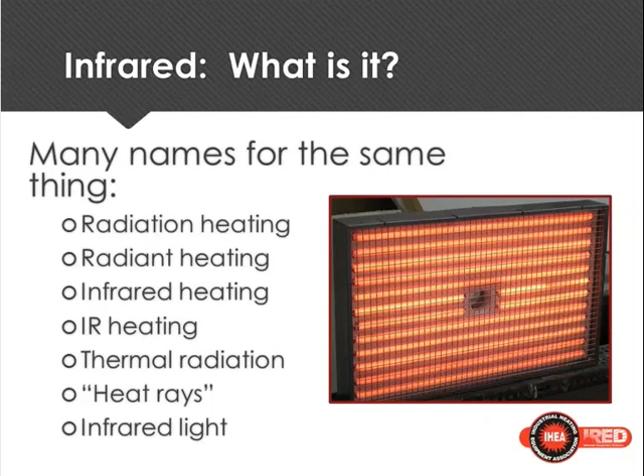Just a brief look at heat transfer, because this is how we need to talk about infrared basics. If you think about a campfire and you put a metal poker in the fire, it's going to get hot. The heat is going to work its way up the metal, and eventually if you grab that poker that had been laying in the fire, the end of it could be very hot even though it wasn't in the fire, because the heat conducted up the length of the steel poker. That's conduction. It needs contact.

Convection is like holding your hands above the fire and feeling the heat rising effect. Radiation is when you're off to the side and you can feel that heat from the glow of the coals or the flame, but you're not actually touching the flame or in the coals.

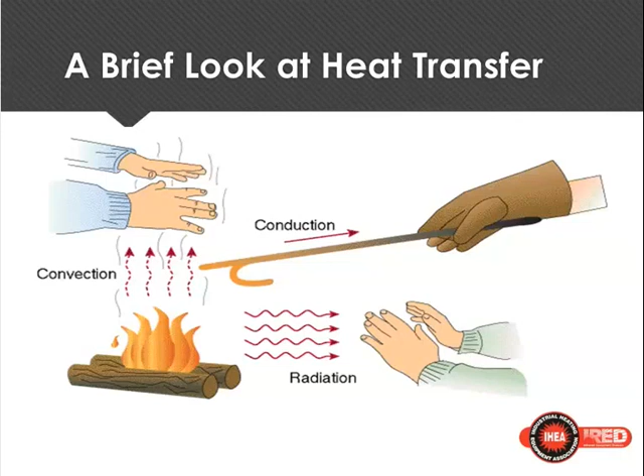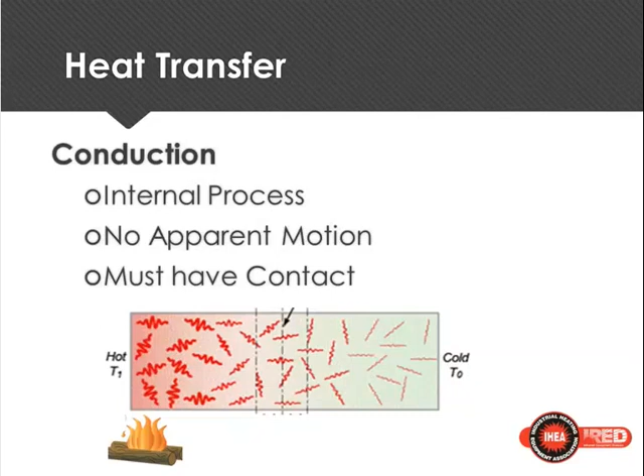So a little bit more on these. Conduction is an internal process. As you can see in the little picture, there's the hot fire on one end of the poker, and that causes excitation of the atoms, and that heat will gradually move down through internal contact. But looking at the poker itself, you don't really see anything moving - it's an internal process for conduction. Conduction can be important with infrared use in a curing process. We'll see that later.

Convection is like a typical convection oven you could have in your kitchen, or a natural gas convection oven, just a typical furnace. You have a heat source - it could be electric, it could be natural gas - but then you move that heat, you blow that heat, you force that heat. You can have natural convection, which is like heat rises and cool air sinks, but forced convection is typically the process we see, and it's an external process. It acts on the external part of a turkey in an oven to cook it. So convection requires some motion, and you heat all the air and move the hot air around the item to be heated.

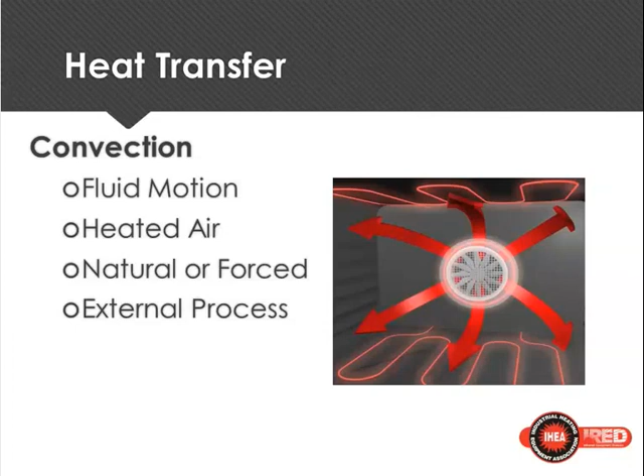Radiation, which is IR, is the third method of heat transfer, and that is the electromagnetic spectrum. If you remember, we talked about visible red, and infrared is to the right of that. There's no medium needed. If you had to have a medium or an atmosphere to move radiation, the heat from the sun would not get to the earth. But the heat from the sun travels through the vacuum of space and gets to the earth with plenty of heat still in it, and the heat comes out upon impact. So infrared rays from the sun impact the earth and heat it up.

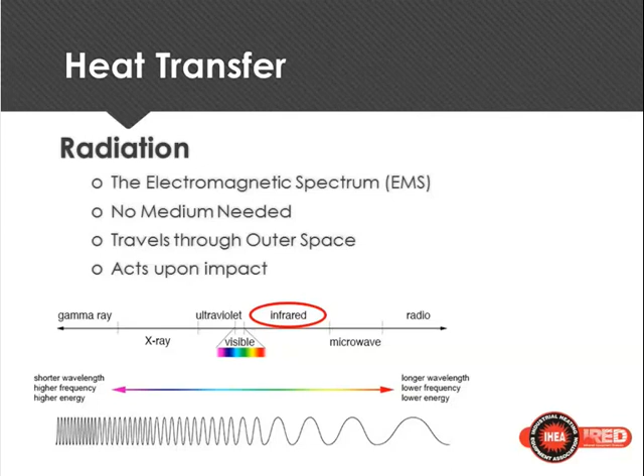Infrared light or infrared heat from a heating element impacts the part, but it doesn't have to heat all the air in between. It heats the part when it contacts the part. We'll see a little bit more about that in just a minute.

Here's a few characteristics about infrared. Not all infrared is created equal, and you can target your infrared heating wavelength to suit the product you're going to process. If you need a short wave or a long wave, the infrared equipment manufacturers can help you determine what's best for your process and application.

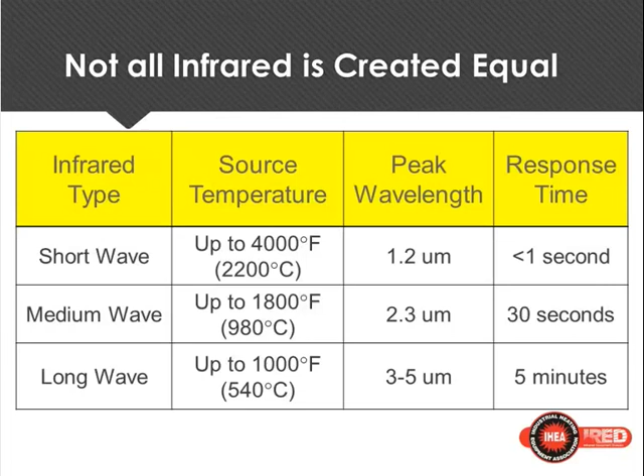Here's a graph of those same characteristics. Going from 0% to 100% available energy from the infrared source, you can see the short wave gets to 100% output in a matter of seconds. Medium wave takes maybe a minute or half a minute, minute and a half, and long wave takes up to 4 or 5 minutes. So processes that need fast, hot would tend toward short wave, and vice versa.

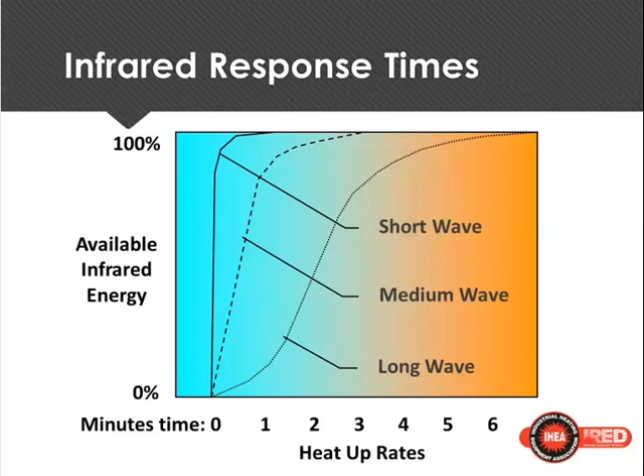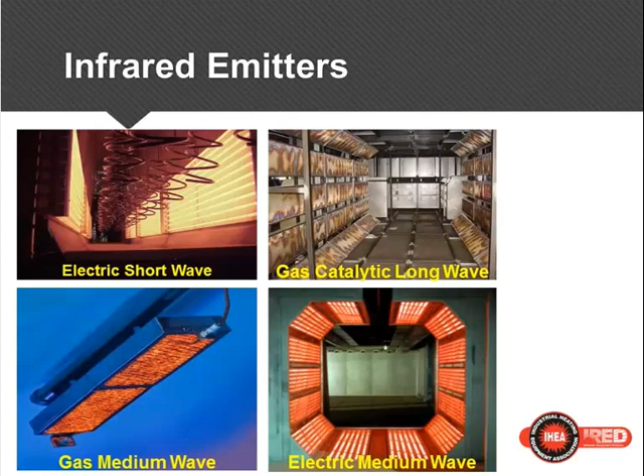So just a quick review about what is IR. It comes from the Latin infrared - infra means under red on the electromagnetic spectrum. Heat transfers by radiation, which is a line of sight to the part from the heating element. It's part of the electromagnetic spectrum, and it comes in a variety of wavelengths you can make use of depending on your special application or product shape, size, or configuration. So short wave is very fast and very hot, medium is pretty fast and medium hot, and long wave is a little cooler, still hot, and takes a little longer.

But everything with a temperature above absolute zero, anything with heat, emits some infrared energy. Human bodies do, electrical wires, anything hot, a heating duct inside a building, an oven, buildings - just looking at the envelope of a building. The higher the source temperature, the more energy that's emitted and the more intense it is. So a mouse is going to emit infrared energy, but you can't cure powder paint with a mouse. Heating elements have intense shortwave infrared, and it requires a line of sight - that's not necessarily a limitation, but to get the heat into the part, it needs to be seen by the element. But if there's a blind corner, that can be heated through conduction.

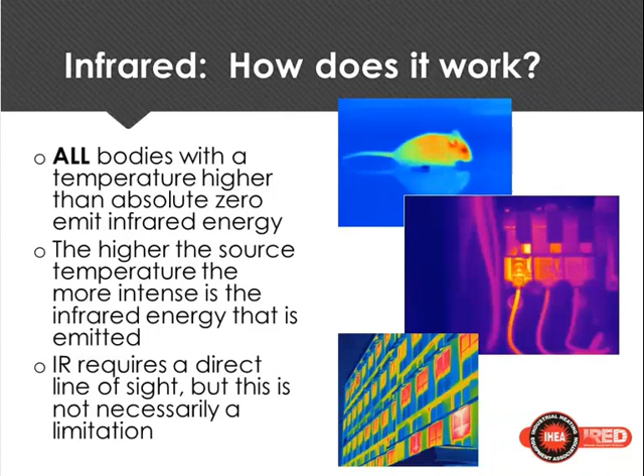The absorption is the key. So what your equipment guys can help you with on an application is find the right wavelength, the right configuration of the elements, and the right heating levels so that most of the energy gets absorbed and your part will get hot. You don't want to have it blasting through there with 90% of your energy being transmitted or 90% of it being reflected. You want to optimize your infrared heating element to your part so that most of the energy is absorbed at the proper level. And again, the energy source can be natural gas or electricity.

So for an object to be heated by infrared, part of it has to be absorbed. If there's no absorption, it's not going to get hot. If it just passes through it or reflects, it's going to be very limited heating. An object must absorb some of the infrared energy to heat up.

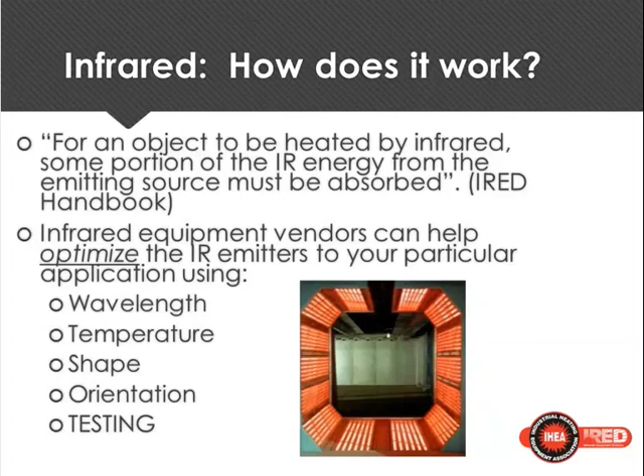So you can do a recipe for a given part. But picking the wavelength, the temperature, the shape of the emitters, their orientation toward the parts, and then of course the bottom line is you're going to want to run tests and make sure the configuration works the way you want it to.

Stefan-Boltzmann law - this isn't something we're going to try to do any math on today, but the whole point of this is just to show you that the power from infrared is proportional to the temperature to the fourth power. So there's some Stefan's constant, the area, the emissivity, and the temperatures. But the bottom line I'd like you to get out of this is if you double the temperature, you get 16 times the power.

So the fourth power - 2 to the fourth power is 16. So you really get with a little bit of temperature change, a lot more energy transfer with infrared.

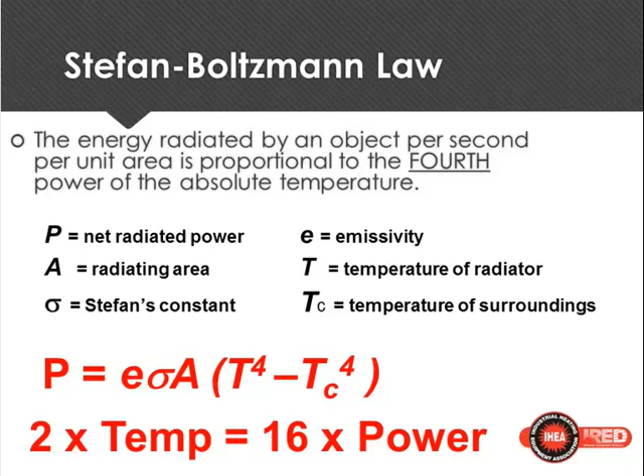Just a few things about the emitters. Again, we talked about shortwave, and here's some examples - very hot, very fast, up to 4,000 degrees heating elements. Can heat up very fast. They're pretty much instant on, instant off, which can be very good for production or changeovers, and very fast response time.

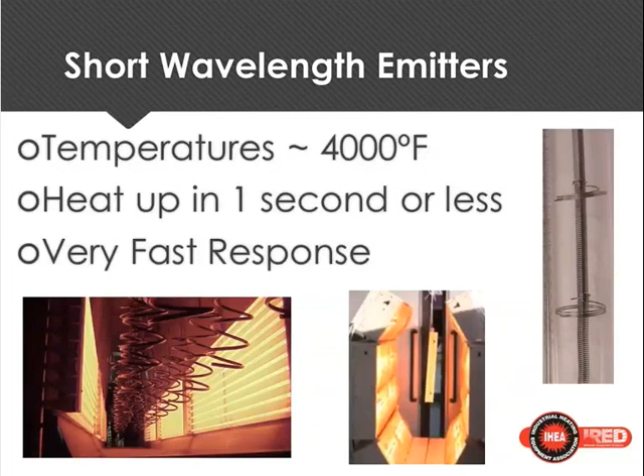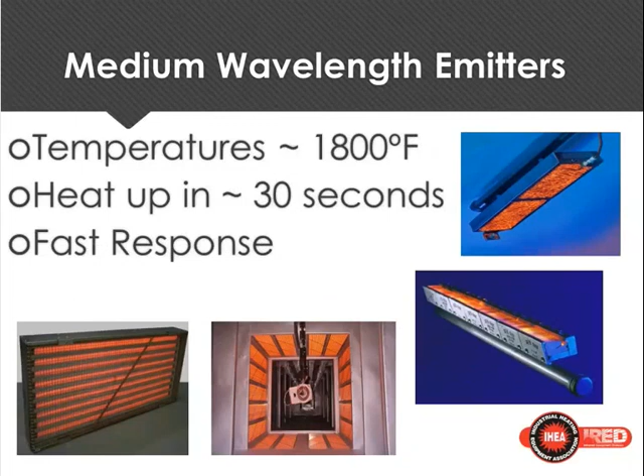Medium wave emitters, again, are more down in the orange color range, 1,800 degrees, typically pretty fast heat up rate still. And then you've got your long wave, which is more of the dull red, lower temperature, but some processes don't need high temperatures. Heat up is still fast compared to a natural gas convection oven.

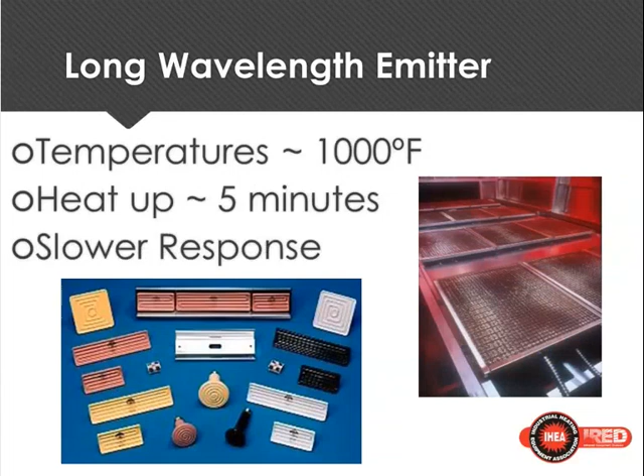So a quick review of how IR works. You need a line of sight. All the emissions from IR - remember this is important - they're going to be reflected, transmitted through, or absorbed. And absorption is the key to getting heat into your product from an infrared source. The energy source to create the infrared can be natural gas or electricity. And there's a very wide variety of emitters, arrangements, sizes, recipes, and programming that can optimize an infrared oven to your parts and your variety of parts. The IR equipment vendors can really help you optimize your system to match.

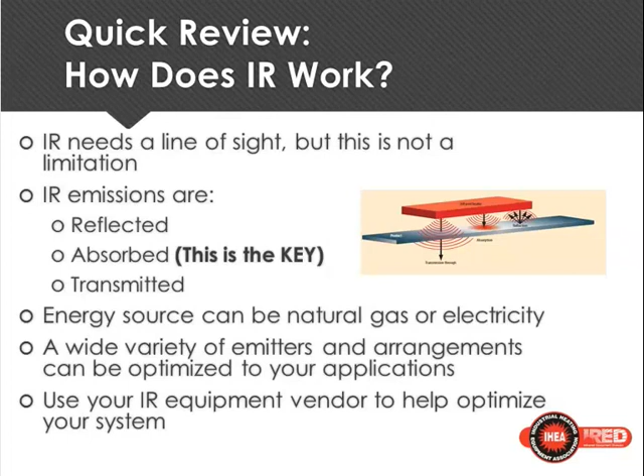Here's just a few factors to consider when selecting IR: the total output you need, how far you should be from the emitter, and the reflective characteristics. Are you trying to infrared heat something black or dark, or something shiny and reflective like a mirror? Is there air movement, or do you need air circulation? What's the aspect ratio—are you doing a sheet of plywood, or a solid cube? All those factors need to be factored into your process.

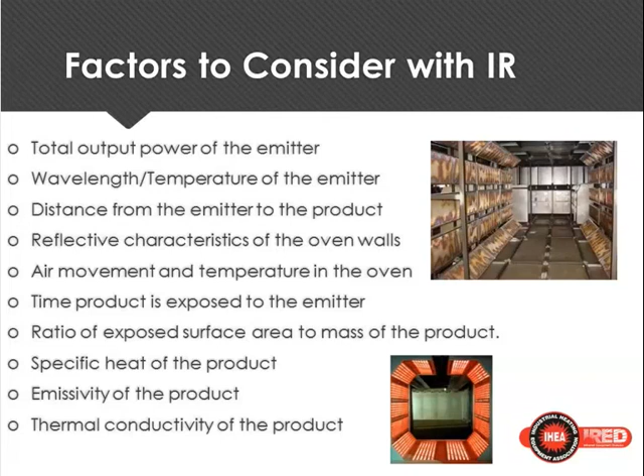Some typical applications—the guys are going to take off on this next, but here are a few things you can do with this. That picture is a thermally formed laminated floorboard for a car; you use infrared to heat it up and then mold it to this shape. There are dozens of others beyond what's listed here, but those are some of the main industries that use infrared.

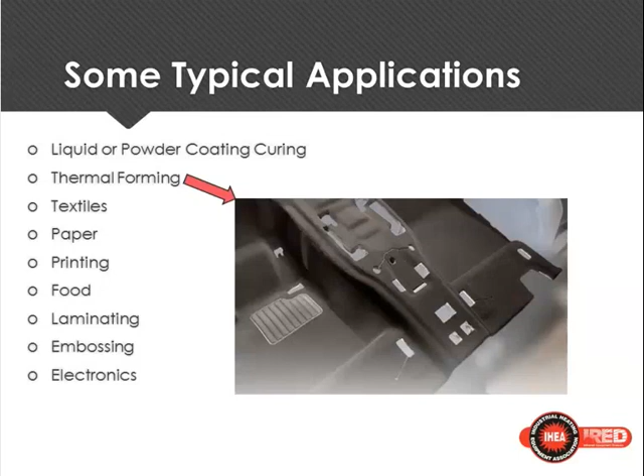So just a basic review: infrared is part of the electromagnetic spectrum of radiation. It's very fast and very efficient—almost 98 or 99% of the energy from electric heating elements is converted to heat. The applications are very flexible, nearly unlimited. You just need to get with your IR original equipment manufacturing vendor and test it. You can arrange the elements geometrically, set the heating, the timing, and the geometry, and really optimize for any given part. So the applications are literally just about unlimited.

And that's all I have.

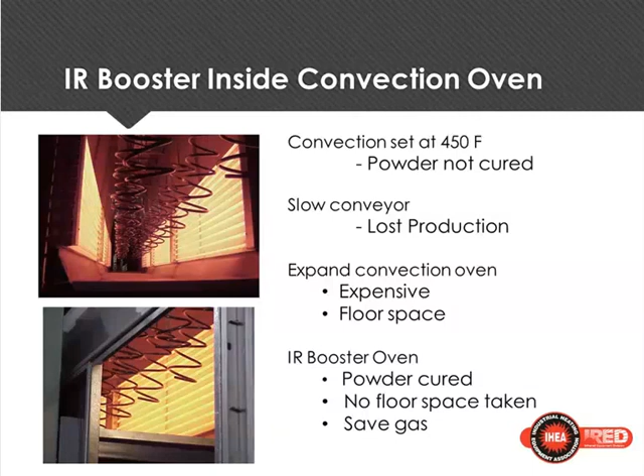This customer did not want to change how he loaded and hung the springs. Some powders have overbake in them, so here we had a 100-degree differential, but there's a 100 degree overbake in the powder. Keep in mind, all we're trying to do is speed up his process, get more heat into his product faster in the first part of the convection oven, and the rest of the hot air will normalize this. At the end, these temperature curves come together and finish out his process. In 2 minutes and 23 seconds, we were able to speed up his line and create the production he was after.

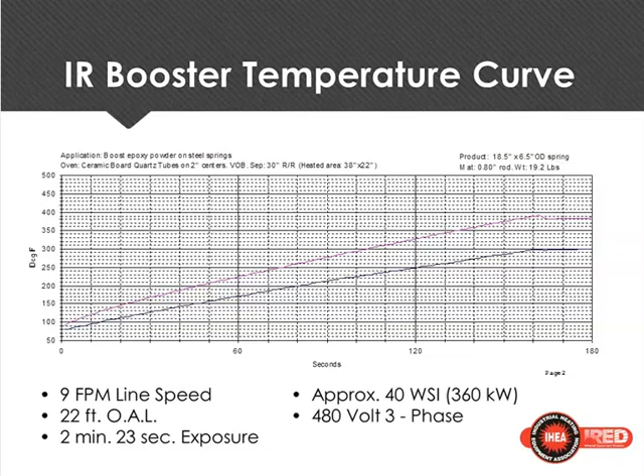This next process is something we do through lab testing—we found that short wavelength T3 quartz lamps work well for curing water-based lacquer finishes on cabinet doors.

And we also do the stains, the sealers, the coatings, and stuff like that. Keep in mind that when these elements are in front of the heaters, the parts maybe get exposed for 20, 30 seconds at the most. That's all it takes sometimes. Again, lab testing and knowing the product, the different stages of stains, sealers, and top coatings in this industry matters. It doesn't take a lot of time to do this stuff with infrared. It just needs the right wavelength that works well with the application. So again, lab testing.

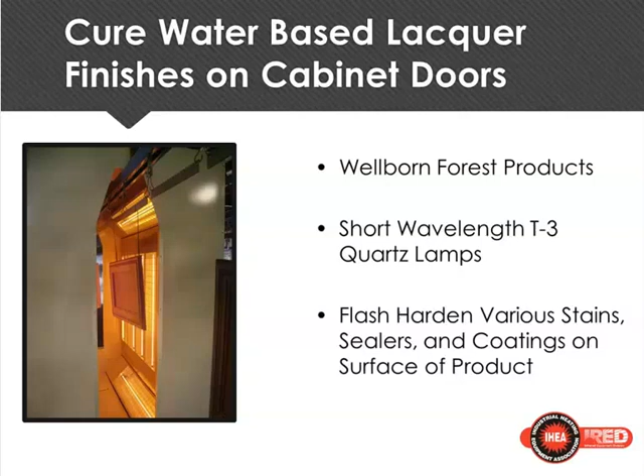This next application is a rubber, water-based coating, again on extruded rubber seals. They're running this rubber seal like a door seal on an automobile, at 30 to 80 feet per minute. This is rubber, and it's black, and it heats up really quick. And if for some reason the line stoppage of the rubber seals going through here would stop, it would burn up in the intense heat that we have in here.

So again, we chose shortwave quartz lamps because of the fast response time. This thing heats up and cools down. We reduced our cycle time from minutes to less than 30 seconds, depending on what seals they're running through this oven.

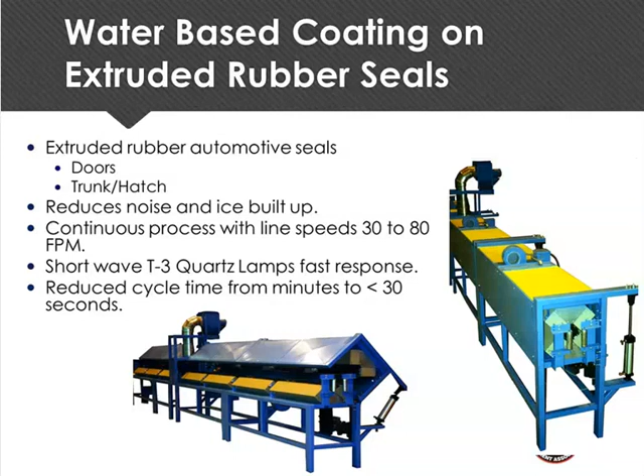I like using this next application because, as Michael said, you can zone an oven. Here we're curing powder on fire extinguishers, and on the bottom of the fire extinguisher is the coupling welded onto it. That's where most of the mass and the heaviest metal is, and as you can see, we have more heat turned on to get the bottom hot, less heat on the sides, and we've got a zone on the top. Typically in an application like this, we design the oven so we have a build and a hold zone. In this case, we're building the heat with shortwave infrared and holding with medium wave. We have 3 zones in height and 2 zones in length, and we're doing a full cure at 375 degrees.

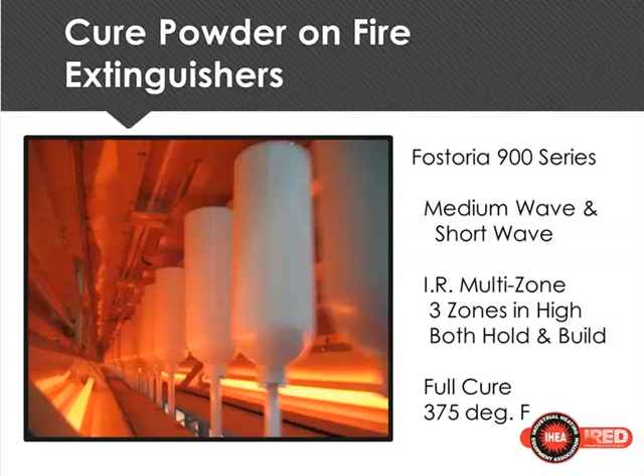One of the things to make sure of, though - this was all done with full buy-in by the powder vendor in this case. You need to make sure, because some powder vendors say on the side of the box that they need substrate temperature of 375 degrees for 10 minutes, possibly - could be a typical structure. So what you need to do is have the powder vendors and any coating vendor present when you're running lab tests, to get buy-in on the process, because in this case we got full cure. It passed the 50 double rub MEK, the crosshatch testing, and we had no problems with it. So again, this is the reason we run lab tests, so we can speed up processes for people - the 50 MEK crosshatch testing.

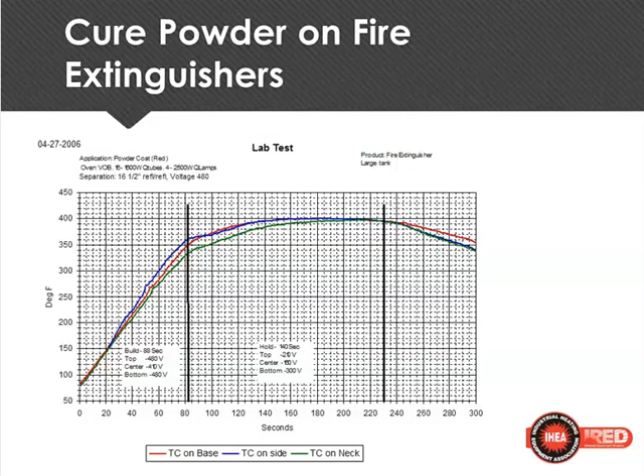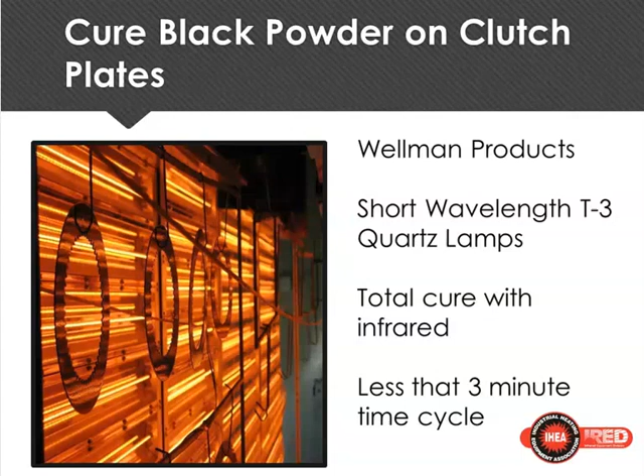In a convection oven, again, it'd be 30-plus minutes, and we're doing it in 10 minutes or less. But it can be done. I guess, again, lab testing is the key.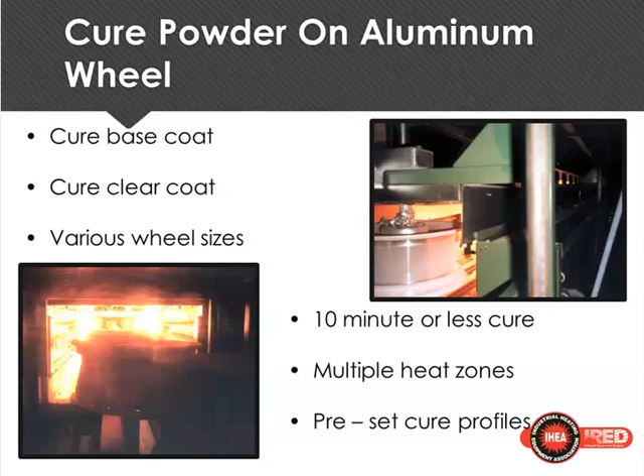Here's a high-density infrared oven. We're preheating a steel web. This product that runs through these ovens is running at 225 feet a minute. In this oven, it's only 38 inches of heated length. We see the product for 0.84 seconds in this thing.

We're trying to get a product temperature from ambient to 160, using 100 watts per square inch of shortwave infrared. Again, shortwave because we need the response time. What we're trying to do is heat the surfaces of this product, the coil going through it, so that it's a little more pliable. The coating is pliable, and the metal's got a little bit of temperature in it, so it goes through the roll former better. The edges of the coating don't crack or create problems going through the roll former, and we've also found that having the warm material go through the roll former means a little less wear and tear on the equipment.

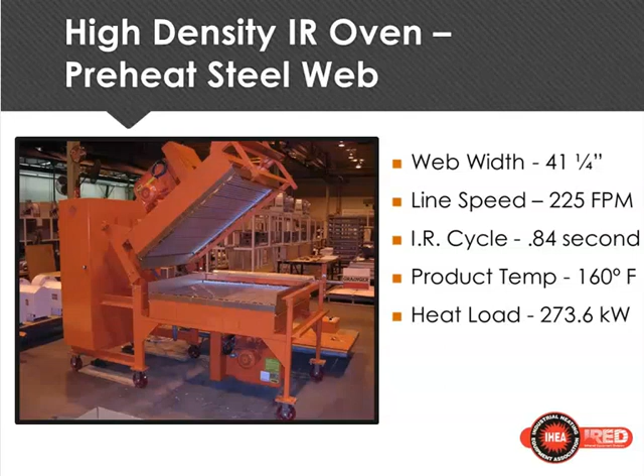Here's something where we're curing powder on automotive seat springs. In this application, all we're doing is curing the powder where they cut these springs into shorter lengths for different vehicles and different types of seats. They were already E-coated, and what they're trying to do where they cut these things, on the bottom little tip, is actually just cure that.

So this is a shuttle, an indexing oven, and the heat comes up and just heats the tips of those things. It goes back down out of the way. The next one indexes, and when it goes to the next station, it's a fluidized bed of powder, and it gets the powder on the hot part, then goes into another section that actually cures that powder. It's an indexing setup, and all we're doing is curing the little tips of these things so they don't rust with the powder on it.

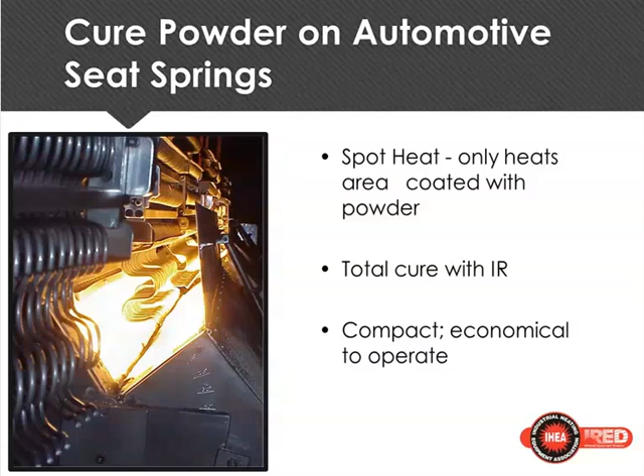So it's little spot things you can do. In a convection oven, you'd have to heat the whole thing back up, with all the energy that would take, but here we're just heating the tips of the product to do exactly what we want to do with it.

Here what we've got is an infrared batch oven, which in most cases you'd see as convection, but in this case we're curing flat sheet metal panels and parts for a customer who had to heat up his big batch oven to run all his little sheet metal parts, and it was taking him a half hour, 45 minutes to get up to temperature and cure it. We found with lab testing that we could get this done in 5 minutes, using only 6 watts per square inch of emitter, medium wave infrared. It doesn't take that much, but the parts get up to temperature and cure in less than 5 minutes.

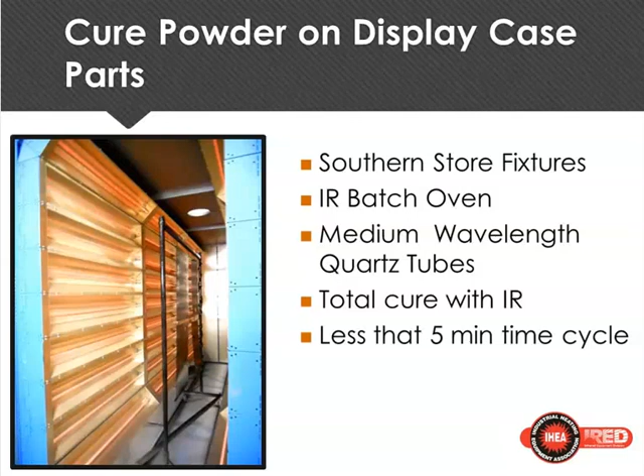We can also use infrared to do curing, and we also use it for water dry-off. We have customers using medium wavelength quartz tubes. We introduce a little bit of air through the reflectors, and we're doing full water dry-off on these parts in 1 minute, and getting a full infrared cure on these parts in less than 2 minutes.

This line's running at 18 feet a minute. He's got 18 feet of dry-off oven and 36 feet of powder cure oven, which we divided into 2 zones in length, so it's 1 minute to get to temperature and 1 minute of hold, and he's getting full cure on a lot of his sheet metal parts.

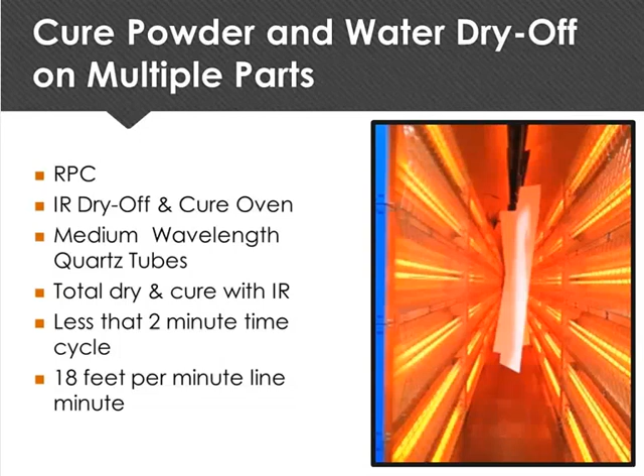In this next slide, I want to show you this guy is also a job shop. This is that same oven, the 36-foot length, but as you can see in the bottom right picture, we've made it so he can run a 2-foot part window, or he can roll these banks out and have a 4-foot part window. If he gets a bigger, heavier, more geometric shaped part, he can roll the banks out, have a bigger part window, and slow his line down for the bigger parts.

And when he's running his little flat sheet metal parts, he can push the banks in, so he's got the smaller part window and runs the parts a lot faster at 18 feet a minute, getting a full cure in 2 minutes.

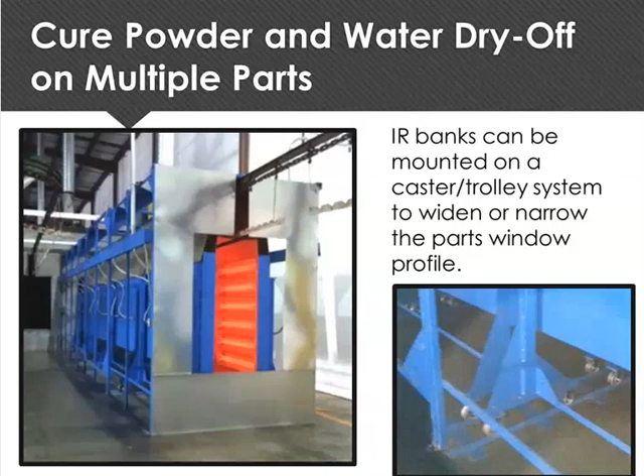This is a typical web application. We're heating automotive carpet, carpet backs, using fast response medium wave heaters that run up to 40 to 50 watts per square inch of emitter surface temperature. These emitters are fast response, not as fast as a shortwave lamp, but we needed to get all the way across this 6 and 8 foot web. Notice the back side is reflective material, and we run the web beside it. Since the carpet has some porosity from the needling, energy passes through and reflects back onto the carpet itself. So keeping the inside walls of any infrared oven reflective, so the energy can bounce all around, is a good thing to do.

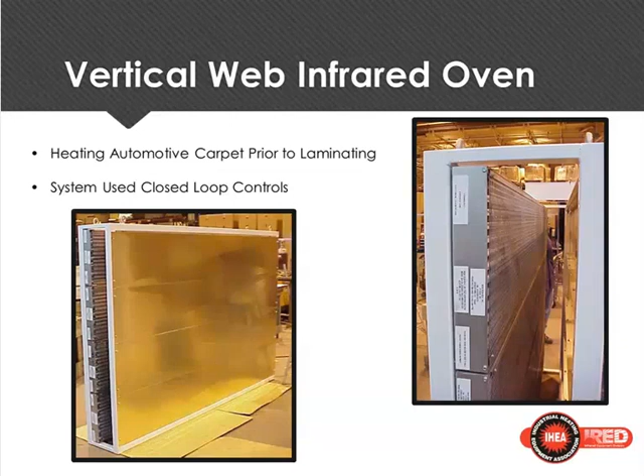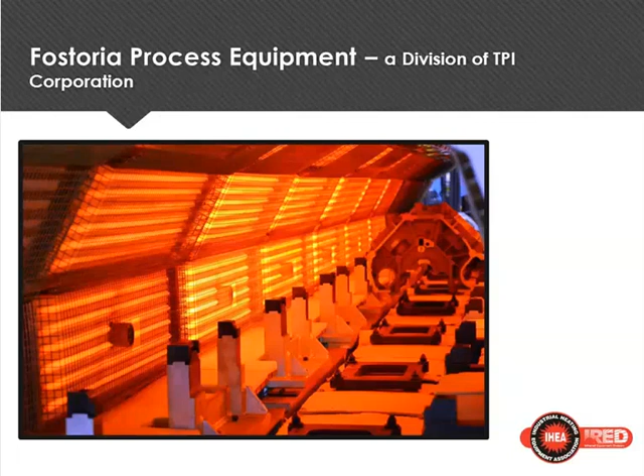Here's another one we're doing. You would think you'd need a furnace to normalize metal on huge crankshafts, but we're using medium wave infrared in this application. The crankshafts are hanging, coming off the lathes where they're turning the journals, and where those get hot, they need to normalize all the metal in the whole thing so they stay straight. Usually they put these on racks and then into a furnace. What they found is when we're hanging them like this, they actually end up straighter than sitting on a rack, because on a rack they're only supported in two places, and here they're hanging down. We're able to get 550 degrees in this oven with medium wave quartz tubes that run color temperature about 1600 degrees, with an aluminum silicate board design inside the oven.

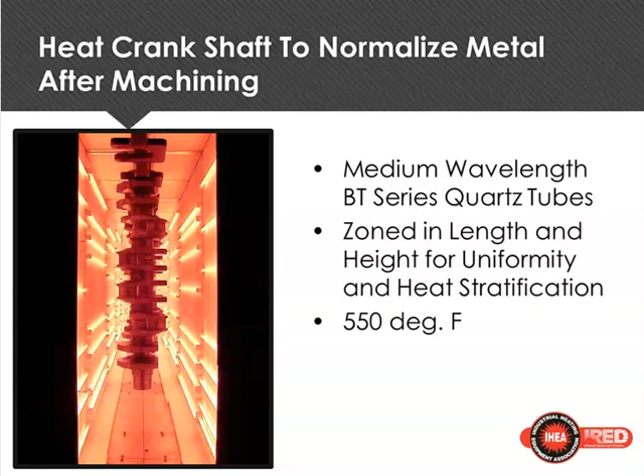That's all I have, just enough applications to maybe spark some interest. If there are any questions we can take those. If not, we're going to go on to Michael Chapman, who's going to show some gas catalytic applications for you.

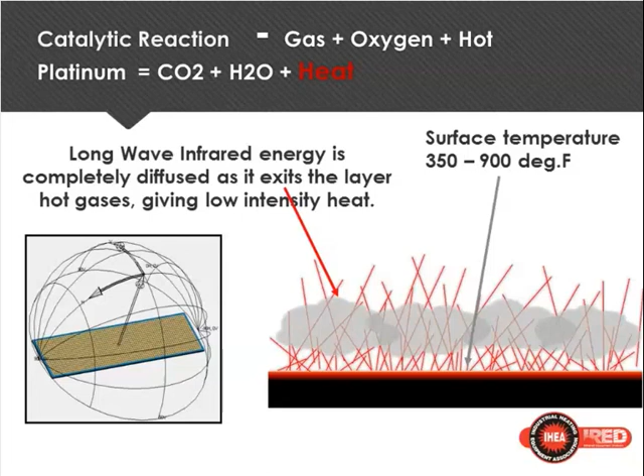The process requires the platinum to be at around 300 degrees Fahrenheit, so we have an electrical preheat buried inside the heater. That is on for approximately 15 minutes. We have a safety device in the back of each heater, because we don't have flame safeties since there's no flame in the system. Once the thermo-switches all close, we know the catalyst is up to temperature and ready to receive the gas.

And the gas comes on. We keep the preheat electric heaters on for approximately 3 minutes to really get the catalytic reaction established just below the surface of the heater. Then after 3 minutes, the electrical heaters drop off and into the normal gas pulsing system that we have. The dispersion plate in the back of the heater has a lot of small holes in it that evenly disperses the gas throughout the entire surface of the heater. There's a slight pressure drop between the very back of the heater and atmospheric, so we do get good gas distribution at low fire as well as high fire.

So it's a little different. It takes about 25 minutes total to get the heater system up and running, but once up and running, the preheat goes off and then it's just running on pure natural gas or propane.

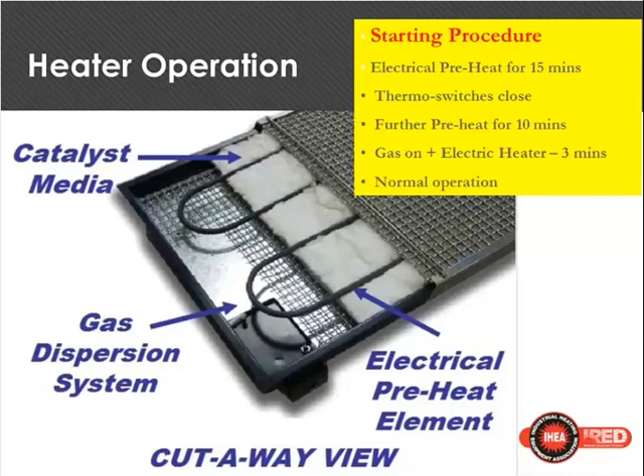Some properties of the catalytic heater: the long wave that Michael has talked about before, we consider it to be colorblind. Long wave cannot really recognize yellows, reds, blacks, whites. It treats it all the same as an organic coating. The surface temperature can range from 350 to 900. It is a true flameless reaction. It's sometimes a little difficult to understand how you get the full BTU content out of gas without a flame, but the catalytic reaction is completely flameless.

In fact, we're approved by Factory Mutual for heating hazardous areas, which in layman's terms comes down to an acetone storage room. That's just how safe they are, as stated by Factory Mutual. We have an even heat distribution across the surface at all levels of firing.

Michael was saying 5 minutes response time. We like to think it's a little less than that. With our technology, we can do it in 1.5 to 2 minutes from low fire to high fire. So we are reasonably quick, and the controls allow us to do that. Safe emissions from CO2 to water vapor, and there's no NOx or CO emitted from the chemical reaction.

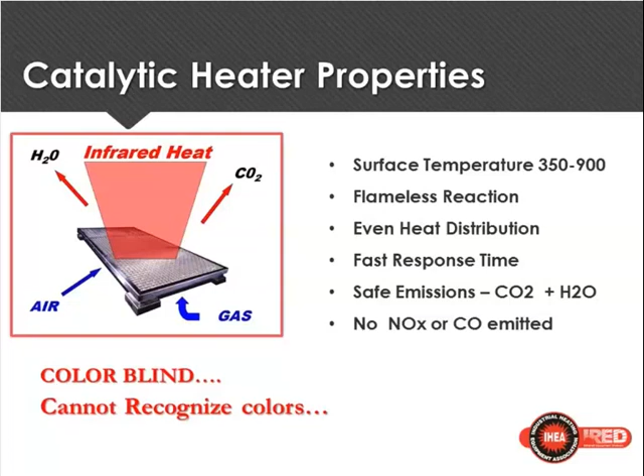Infrared is a good absorber and is well absorbed by water, and typically in the dry-off situation, the parts have gone through a phosphate or some type of cleaning system and a rinse, so that basically leaves what is generally a film of water over the part, and that film really absorbs the long-wave infrared very quickly, as well as short-wave, but long-wave seems to work very well, especially at the speeds that most finishing lines are operating at. You have to be careful about drips and making sure there are holes in the right place to get the water drained out of the part, but it's a very efficient way of drying.

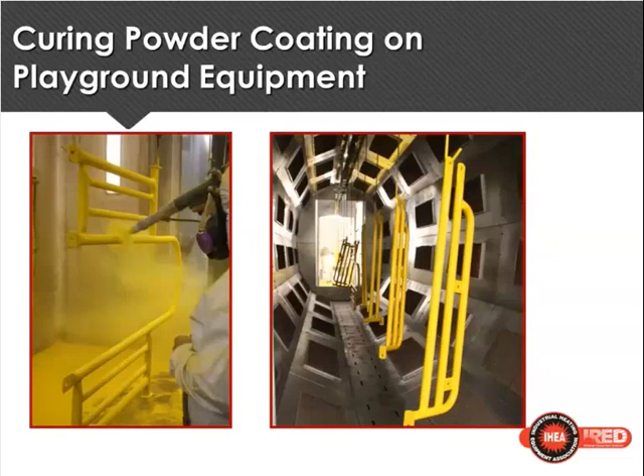Again, as you can see, in all those ovens, we use this galvanized sheet metal as a means of anchoring the heaters. There is no gap between the heaters, so the infrared is completely contained within that space. And as a result of that, we don't actually need insulated panels on the outside of the ovens, because all the heating is done right in the halo within that ray traced part window.

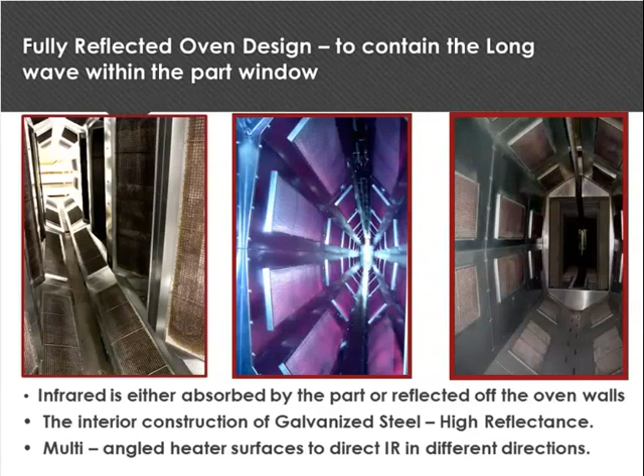And the way we start the whole process is to design what we call a ray trace, where we group the heaters around the part window. Sometimes they're tall, sometimes they're skinny. It just depends on the object, how it needs to be heated.

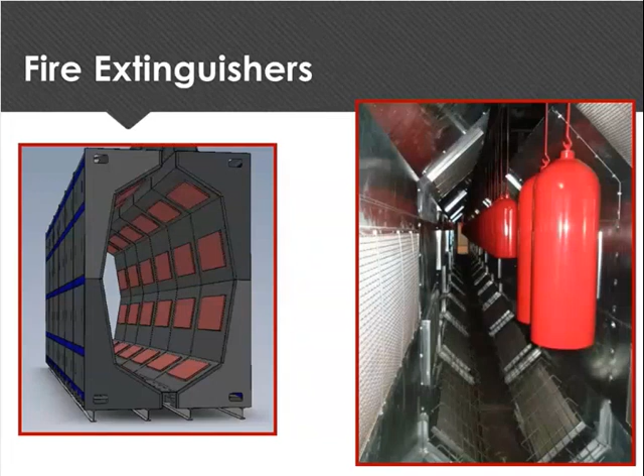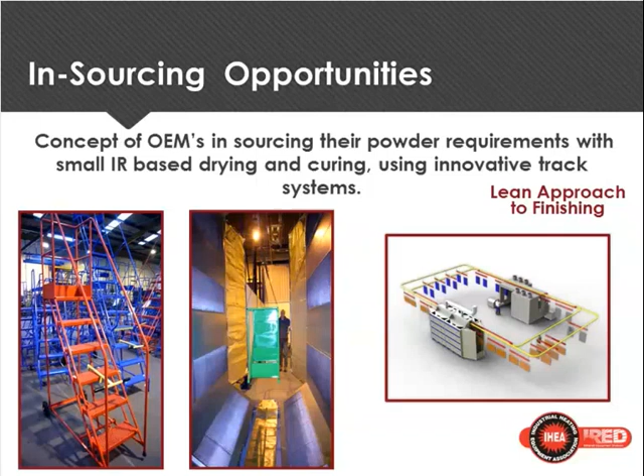Low bake powders are really becoming ever more popular now, especially on MDF. It's a really good breakthrough for us. We're actually down in the curing temperatures to around 250 to 270 degrees Fahrenheit for 3 to 4 minutes. It can be a 1-coat or 2-coat application, textured or smooth. There's extremely high elongation in these powders now, so any edge cracking is completely eliminated.

The design of the oven ensures that these edges are really well cured. That's always the issue with dealing with these engineered wood products. The whole process is now very competitive against thermofoils, and so there's a big move now into the kitchen cabinet market that we're working with. Some very large furniture manufacturers in Europe have adopted this process, and it's been very, very successful. There are a number of these systems operating around the world, and it's really starting to take off now.

And it is only really possible with infrared. In the early days of MDF, it was done through convection ovens, and that was basically a disaster—it was doing more damage to the MDF. With infrared, we're only heating the surface, so the core of the board is not getting to any of those elevated temperatures where the internal resins can break down.

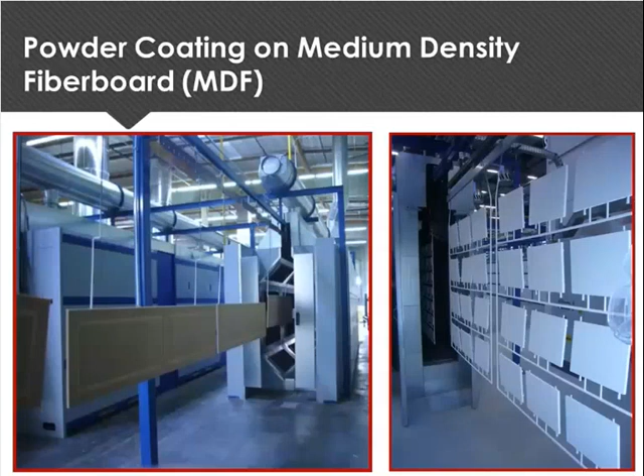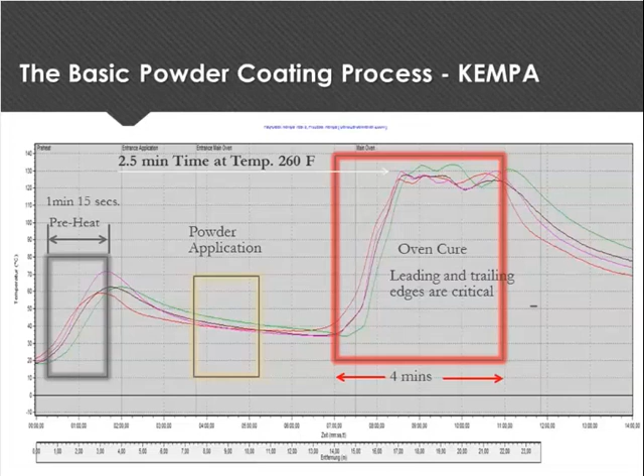An area that I'm not overly familiar with, but gas is still used in high radiant gas burners, and these tend to be much hotter surfaces, as John and Mike have mentioned before. And they're definitely in the medium wave. They tend not to have quite the same turn down that we can get with catalytic. However, they have their place in the infrared market and in powder coating, so it's something that should always be looked into, depending on what the application is.

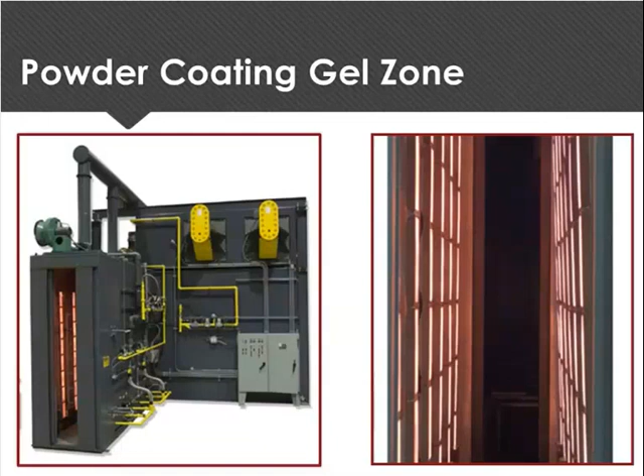They tend again to be a little bit more dense in their BTU consumption on a per square foot basis, maybe a factor 3 to 4 times what the catalytic is, but that can have its advantages, especially if you have fast moving lines. That paper line that was discussed earlier, this may be one of those ways of putting some extra BTUs into it.

And again, on the water drying, as John said, infrared is very well absorbed by water. It really does dry very quickly, and it's just a question of matching the BTUs required to dry the certain weight of water off in the process. So that's I think the story with infrared and water. It is the most effective way of doing it, so long as the process can handle it and the paper's not falling apart. I think that's it.